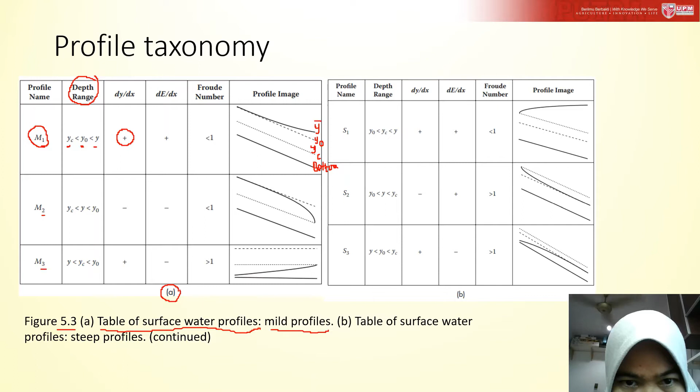So in this case, dy over dx, which means the depth over the distance, is positive. How can we see this? You can see that this is the profile that we are interested with, this y. As it goes to x direction, the depth increases. See? Since the depth increased, we immediately know that the energy increased towards x direction.

For this case, we also know that since y is more than yc, the Froude number will be less than 1, because this is also known as subcritical flow, because your normal y and y are more than yc. Let me erase this. For the Froude number, you always know when yc is less than normal y, then we normally will get subcritical flow.

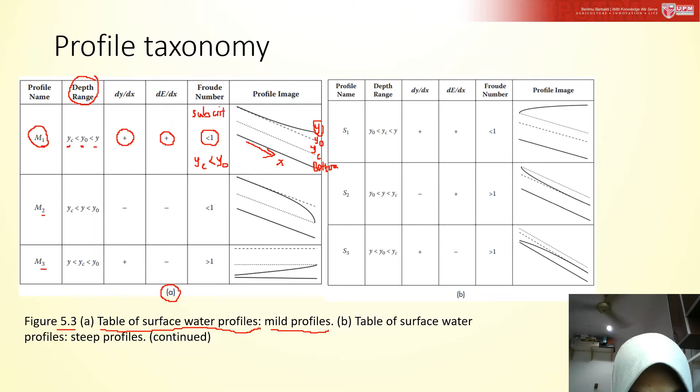So let's look at the category of M2, profile name M2. In this profile, you can see that YC is less than Y, the profile here, but Y is less than Y normal. Let's have the label here. This is YC, Y critical, and the clear black line is the flow profile, and these dotted lines up is the normal depth. Under this situation, the profile name is M2.

And you can see that as the depth goes towards x direction, the value is negative. See? And also, we know that the energy going to this direction is also negative. Since in this case the critical depth also has the least depth among these three, this is also subcritical flow.

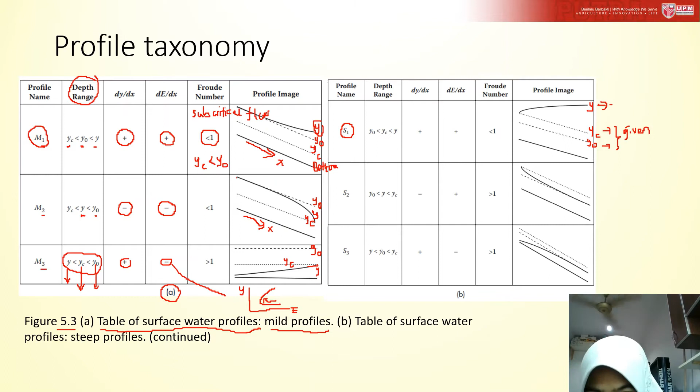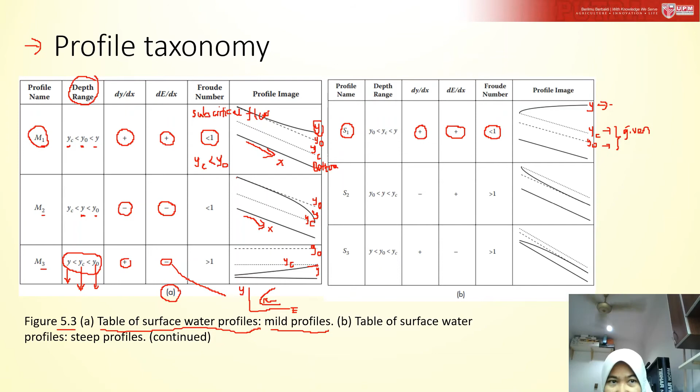So from here, you can see that the depth increases, which is why you have positive, and then surely the energy will increase, and under this category, the flow will be subcritical flow. Okay, this is how you read the profile taxonomy. Whenever you are trying to solve a problem, you have to identify what kind of profile, so you can always refer to this figure. You can try yourself for the rest of the profiles.

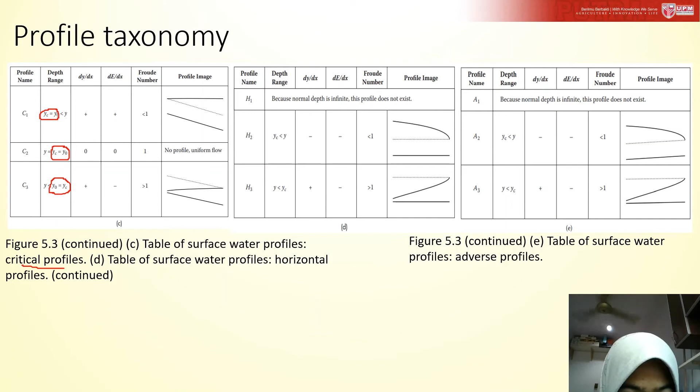Okay, so this is the profile for critical profiles, where Y naught, the normal depth, is equal to critical depth. You can see here, all these profiles have normal depth equal to critical depth. So you can also try to understand this, like what I told you from the previous slide. This is horizontal, where you don't have any slope, so it just goes horizontally.

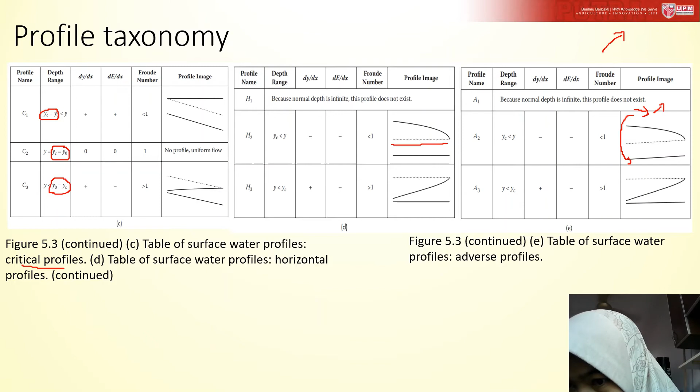And this is adverse. Like I told you, adverse is going in the up direction, the adverse direction. So you can see that the bottom slope is not normal, but it goes up like this. Of course the profile can go either down or upwards.

When we are talking about stream profiles, we are also concerned about stream obstructions, because stream obstructions like a sluice gate, upward step, and constriction have influence on the flow profile. You have seen this before in the previous video. So what are we going to do? We are going to explore a single reach with upstream and downstream boundary conditions of normal depth. Within the reach, we place one of the obstructions: either a sluice gate, step, or constriction.

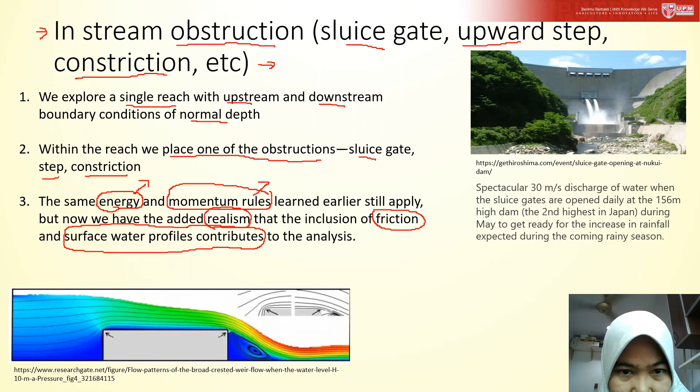So the same energy and momentum rules learned earlier will still apply, but now we have added realism. What is the realism? The inclusion of friction. We have to include the friction, and surface water profiles contribute to the analysis. So the energy and momentum rules will apply, and you will use the same formulas you used before. Nothing new about the formulas for these types of problems.

So I put here two pictures, just as examples. First, this is like an upward step. But actually this is a broad-crested weir, which inshallah we will learn about later. This broad-crested weir also looks like an upward step. So this upward step will change the profile of the water here.

You can see here this is colored in blue. I believe this is about velocity, oh no, this is about pressure, how it classifies the pressure in these types of flow. This is in green, this is in red, yellow, and green, and here we have some blue. If you are interested to know what these colors mean, you can look at this publication. This is about flow patterns of broad-crested weir flow when the water level is 10 meters, under the category of pressure. I just want to show you how the profiles can change when we have this kind of obstruction.

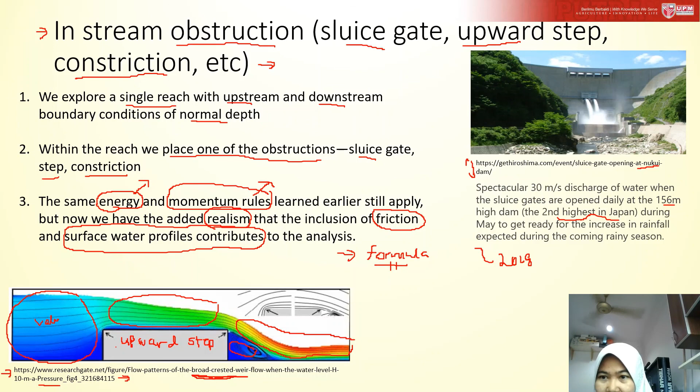This is all for this slide, and then we will do some examples. Maybe I will split the examples into the next video.